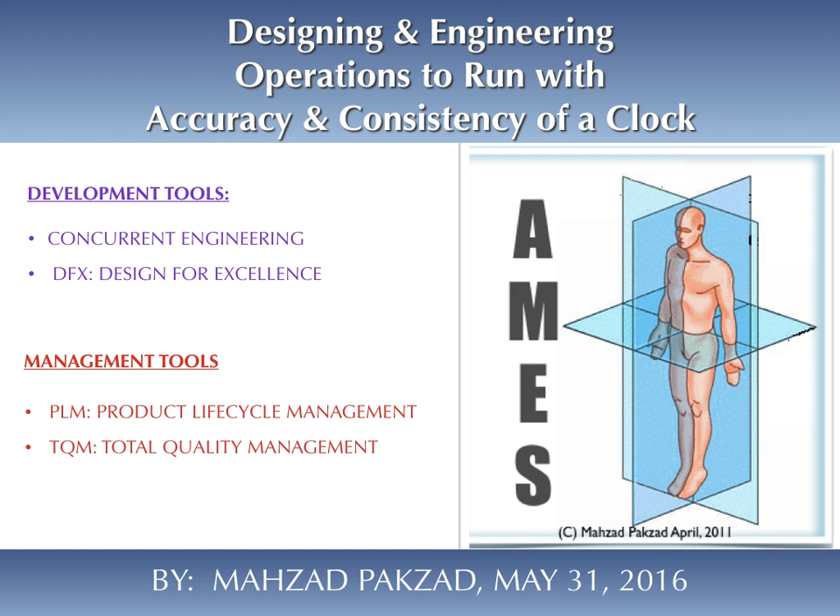Dilemma. Production people are going to figure out the details. They always have. So you're going to rely on what and whom to deliver results for complex operations and high-tech products and processes?

Designing and engineering operations to run with accuracy and consistency of the clock is not for everybody. The key is in having experienced and conscientious technical people with the ability to explain the need for innovative, cost-effective solutions, working as a leader in your teams.

The Boeing 787 Dreamliner is an example, where high-level management tried to cut costs using tools like concurrent engineering, DFX, and PLM, but it failed to sell its reasons to the employees, and therefore they ended up with, quote, all in all, 70% of the 787 is being manufactured outside the United States, up from less than 2% for the 747 in the late 1960s.

A reasonable guess, one that stops short of suggesting, is that Boeing is going the way of Zenith, General Motors, and other erstwhile American industrial titans that have had their clock cleaned in East Asia.

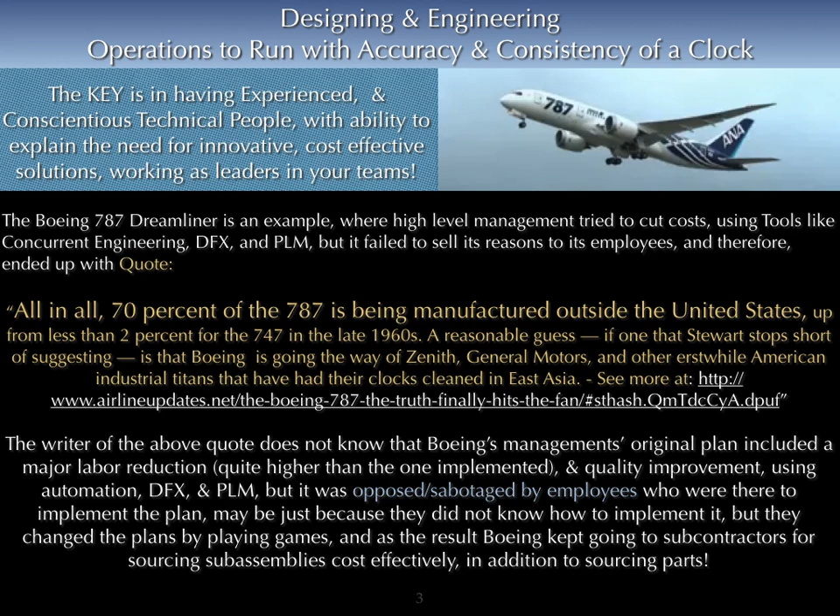Imagine, what if the components in our body were operating without a central nervous system and was controlled by one single brain? Or what do you think would happen if the body components were formed and designed to function without DNA or genetic mapping? Or if there were connection and communication gaps between the nervous system and the brain? Or what if our bodies didn't have the capability to adjust and adapt to environment?

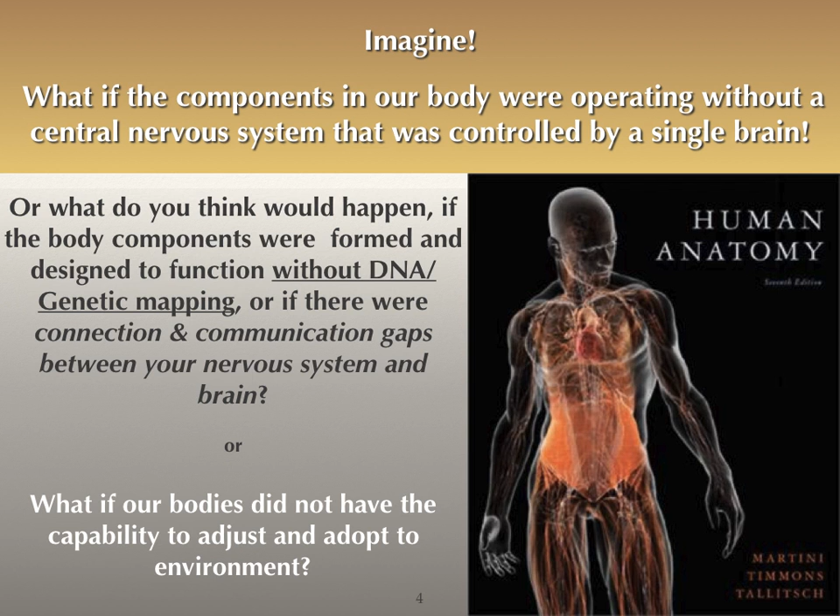In a nutshell, we need to have systematic planning, market analysis, product benchmarking, technology benchmarking for defining quality expectations. These are methods and tools that set the foundation and enable identification and control requirements for major functional units, including design, manufacturing, as well as supplier quality.

Experienced designers and engineers and adequate high-tech tools that both identify and set standards and specifications for building innovative and cost-effective products are very important. Concurrent engineering supports working together, assuring alignment of both design and manufacturing specifications with customer market needs.

Thorough cultural training, educating people for building confidence, trust, and respect to support proper execution of plans is critical. So is positive, proper team communication for maximizing the effectiveness of the teams working together while developing solutions. It focuses on delivering quality outputs consistently, cost effectively.

So many times I've seen so many people in different companies working very hard, delivering results for their own department, for their own business units, but the results conflict with what the requirements for the customer are because they conflict with what the needs for other business units are. So basically, even though one business unit is functioning great, they are not aligning the results with other business units or the customer needs. That is overall a lack of efficiency and waste.

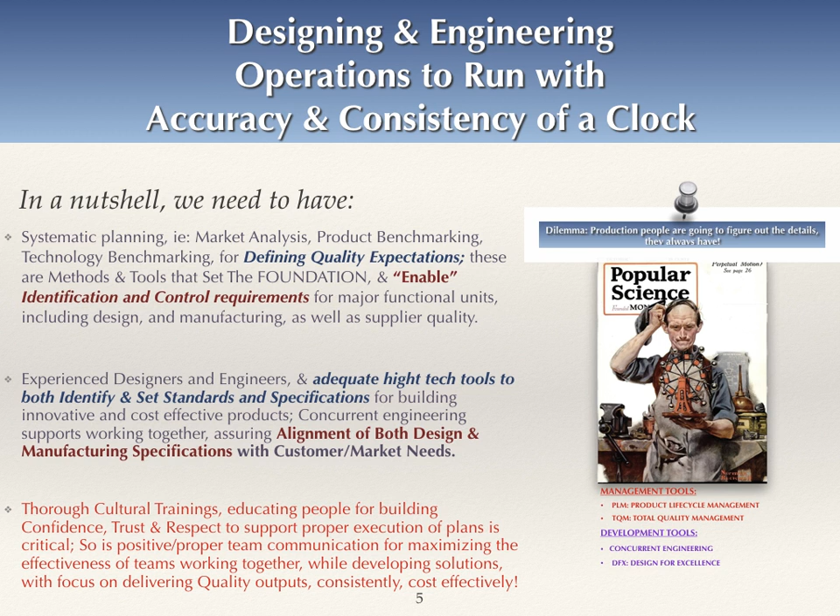PLM philosophy. The purpose of all popular PLM software is to provide one single tool to define and manage all elements that contribute to manufacturing products, from the conception through sale of finished goods. The purpose of having a single tool to manage all is to align all specifications, inputs, outputs, and make sure that all business units are designed and operate to deliver to customer satisfaction cost effectively.

Total quality management is a philosophy that supports analyzing all factors that are inputs to process and influence quality of the products in order to ensure successful quality management. TQM supports success of PLM.

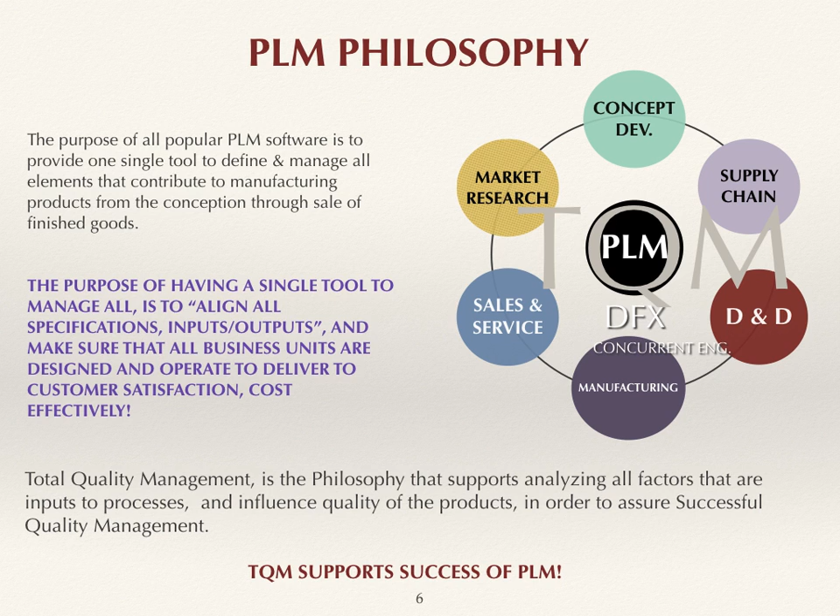Dilemma. Production people are going to figure out the details, they always have. That is not true. Maybe with the old products, where craftsmanship was controlling the quality, this would have worked, but right now the quality is controlled by incoming material. Materials are sophisticated, high tech, so are the processes.

There is very little that production can do to control the quality after they have received set specifications for material, or they have equipment that is designed to run per certain specifications, which does not include the reality of what their product and materials require.

So basically, if market research has not clarified the quality requirements at the beginning, product concept design wasn't done right to identify the volume, quality, and cost requirements, the supply chain wasn't done right to provide the right material, at the right time, with the right quality, or design and development wasn't done right to develop a design where the product is robust enough for the process or the process is capable to deliver the quality, then manufacturing is not going to be able to deliver the quality.

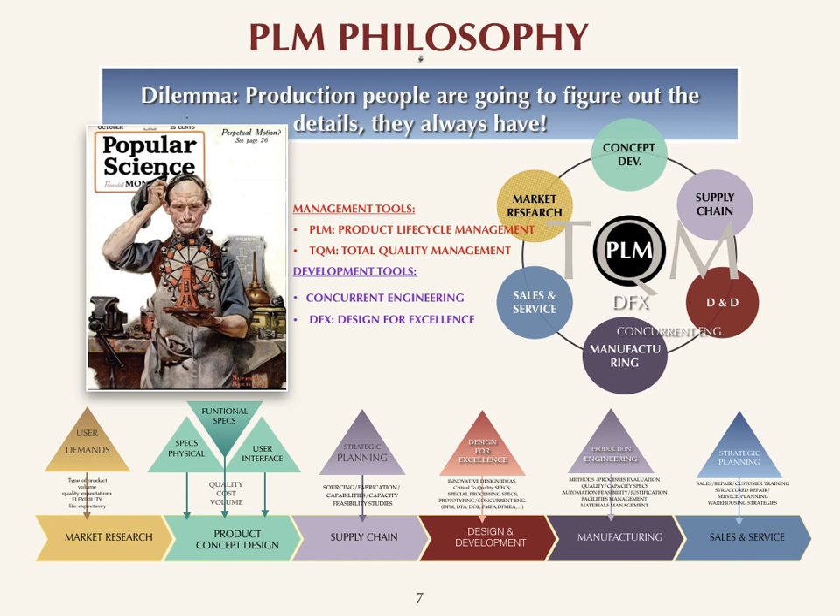Product lifecycle management. Controlling over products quality and cost has requirements beyond software controlled tasks. PLM is just a software for many people. However, it should be a lot more.

Market research. It's the time to identify type of product, identify the volume, identify quality expectation, identify flexibility required, and identify life expectancy of the product so they can determine the quality. Product concept design is where they define customer needs clearly, they define the quality requirements clearly, and they come up with the cost window, minimum, maximum cost, and the quantity

expectations. Supply chain is one we have to decide what are the fabrication capabilities requirements, what is the capacity requirements, what are the options, and perform feasibility studies. Are we going to manufacture this? Are we going to contract it? And how we're going to source it? We're going to make all those decisions through supply chain strategic planning.

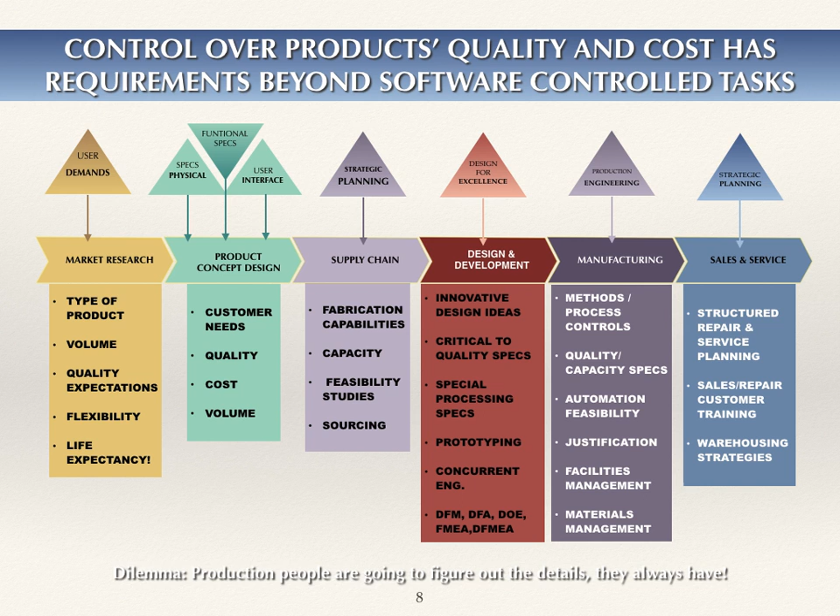Warehousing strategies are getting better actually. That's one area that the people are getting stronger and stronger, with one weakness of not controlling the quality of production, not controlling the design, ability to be robust, and having issues in manufacturing supporting the planning. Therefore, this causes problem in warehousing, mostly because of the failures in manufacturing quality.

Designing and manufacturing products that use high-tech materials and processes are complicated as one ought to expect them to be. Basically, we are in a changing world. Most products these days are more complicated than anybody could have imagined 30, 40 years ago. Materials that we use, they need to deliver products within expected accuracy and reliability, and they need to have the right classification for purity and consistency.

These materials need to be processed accurately within tolerances that their chemical, physical properties demanded. These materials are sensitive materials. High-tech materials are very sensitive materials. Equipment that need to deliver products with an expected quality and reliability need to be carefully designed with upfront knowledge of input variation as well as requirements for output quality and quantity.

I have personally designed and managed the design and development of equipment, and the only reason I succeed in implementing, launching products and new equipment, running them, troubleshooting them successfully, and getting results for a consistent output is controlling the input variations as well as what process requirements are, what components requirements are, what system integration requirements are to control output quality.

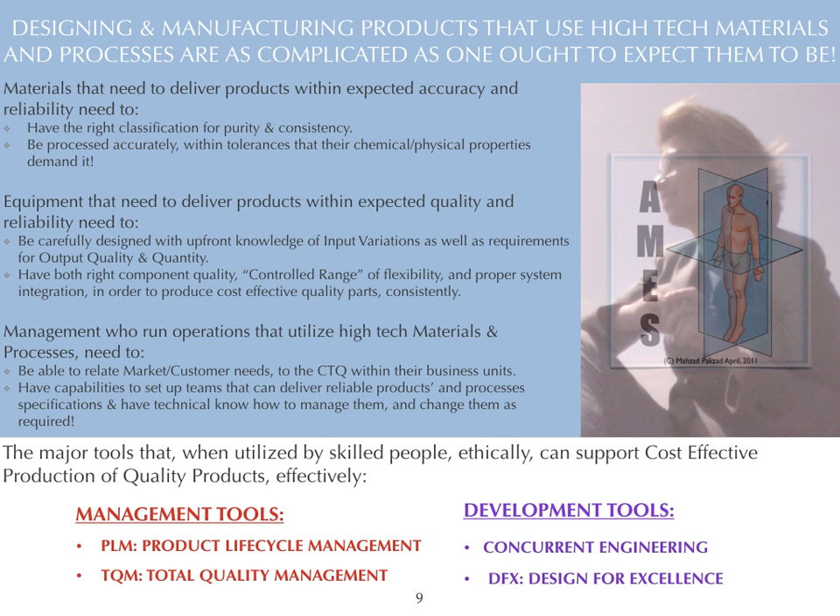Major tools that this management can use are good, great tools actually, when utilized by skilled people and used ethically, and they can support cost-effective production of quality products effectively. The major tools are product lifecycle management, total quality management, concurrent engineering, and design for excellence. Design for excellence calls for upfront evaluation of the entire product lifecycle for identifying parts and operations and all requirements in order to set up manufacturing operations that can deliver the expected customer demands cost effectively.

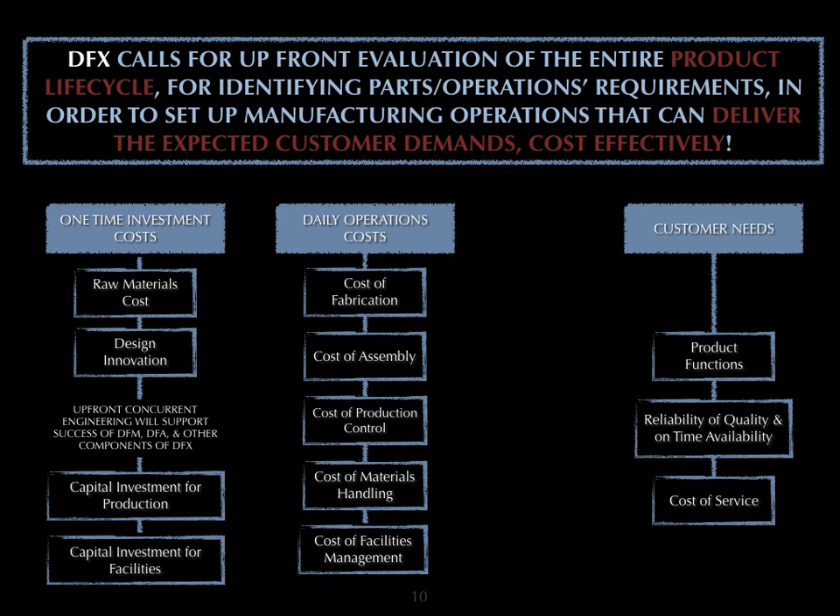It's no secret to those with experience that you need multi-skilled and high-tech professionals to help the team with making the right decisions. I have over 30 years experience doing so, and it's been a challenge, and it's been very difficult, but it's been very rewarding for me to get results where others fail to do so.